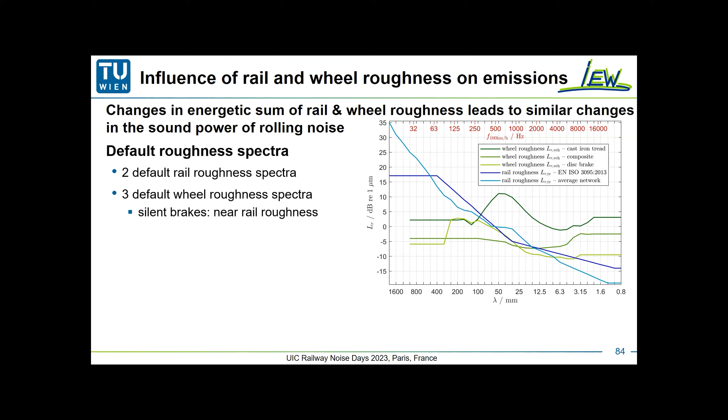And if you look at the case of silent brakes, you see that the rail roughness and the wheel roughness are quite similar in the middle wavelength range, which is very relevant for A-weighted levels. So both wheel roughness and rail roughness will be relevant for the rolling noise when you have silent brakes. Within several national research projects, we also collected some rail roughness measurement results at straight tracks at various sites in Austria. And you can see it again in the diagram.

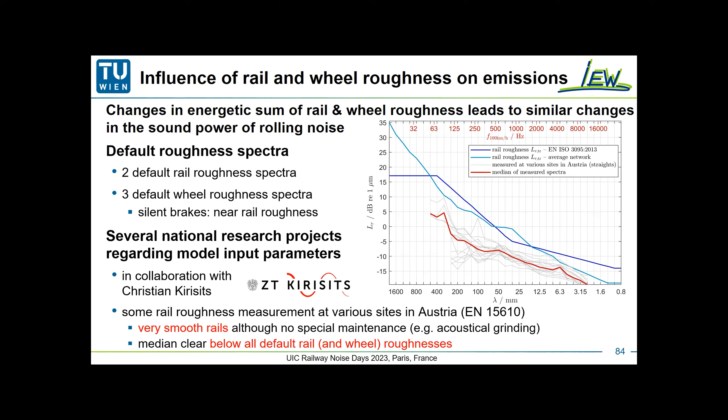At these sites, we have very smooth rails, although no special maintenance like acoustical grinding or something like that was performed. And if you compare the red highlighted median with the default values, you see it is clearly below these rail default input spectra. So what does this huge difference mean for prediction? With a simple variation analysis and some calculations, we have shown that such differences cause changes in the A-weighted level for trains with silent brakes of up to several decibels, and that's quite a lot for a prediction as an uncertainty of the input parameters.

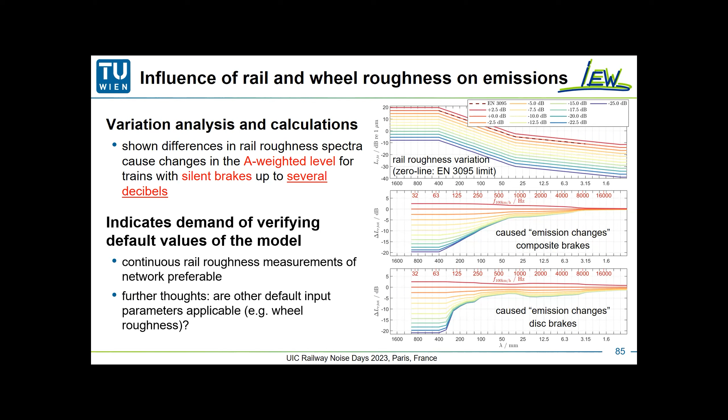So these results indicate a demand for verifying the default values of the model itself, at least in Austria. In case of rail roughness, a continuous measurement of the whole network would be preferable to build meaningful mean values. Possibly with a vehicle-side laser-based measurement system, this could be possible. But we can also think further. If there are such big differences in the rail roughness, what about the wheel roughness? Is it applicable? We do not have any data at all for wheel roughnesses. So there is a demand for verifying such default values from the model to use it.

Now let's switch from the demands to the next point, to curve squeal. Well, within two research projects, we have some long-term measurements, which were carried out in narrow curves with different radii. And because of the huge amount of pass-bys, approximately 55,000 pass-bys, we developed empirically a squeal detection for an automatic assessment of the pass-by noise, which can distinguish between tonal components and broadband components. And based on this evaluation of the pass-by noise, we investigated some influences of radius, train type, and so on, also on psychoacoustic effects.

But beyond that, we also did a verification of the default surcharges in the prediction model. These are also some default input parameters. They are +8 dB for very narrow curves and +5 dB for a little bit wider curves. We found that squeal on loud trains only has a little influence on the pass-by noise level. And therefore, because of these findings, we were able to lower the surcharges in the national implementation of the model for loud vehicles. We lowered them to +5 dB, respectively to 0 dB, for cast iron braked vehicles. I think this is a good example of how successful research can contribute to improvement in the prediction model.

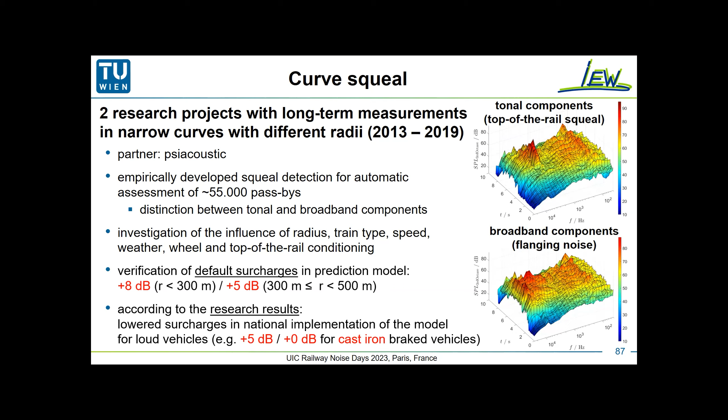So as a third, we came to transparent noise barrier elements. Well, it is well known that between trains and reflecting noise barriers, multiple reflections occur, which lower the shielding effect of the noise barrier and which increase the emissions behind the barrier. To lower the visual barrier effect of such barriers, more and more transparent elements are integrated in noise barriers, and they have a similar effect on the emissions behind the barrier, up to several decibels. But there is no calculation scheme in the model.

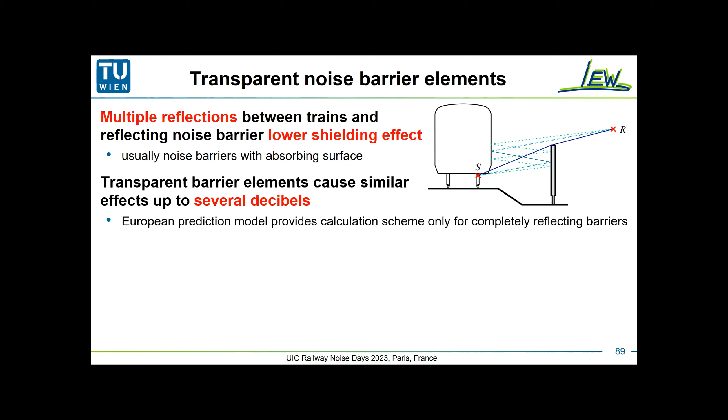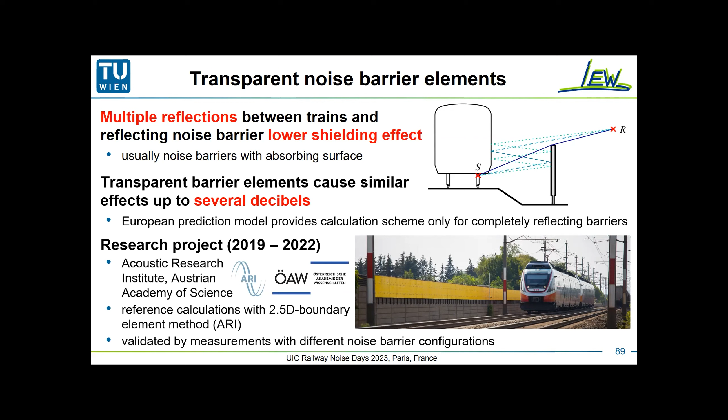How to consider this. Therefore, we had another research project to study these effects in detail. There we did some reference calculations, which provide very exact results of the emissions behind the noise barrier. And we validated these reference calculations by measurements with different noise barrier configurations, as you can see on the right side. And the main result was the development of a calculation scheme for partly reflecting noise barriers, which is already well prepared for an integration into the national regulations.

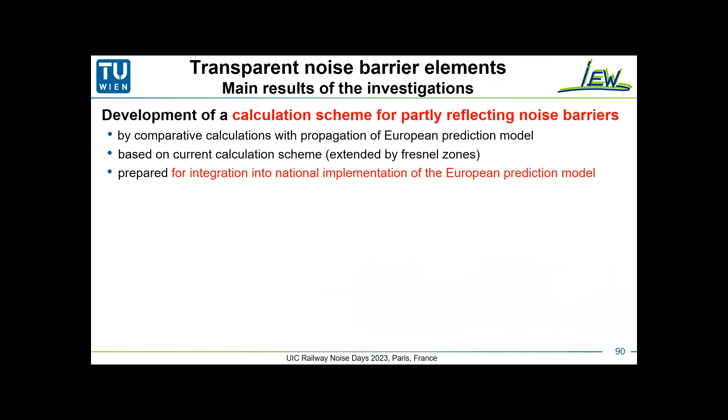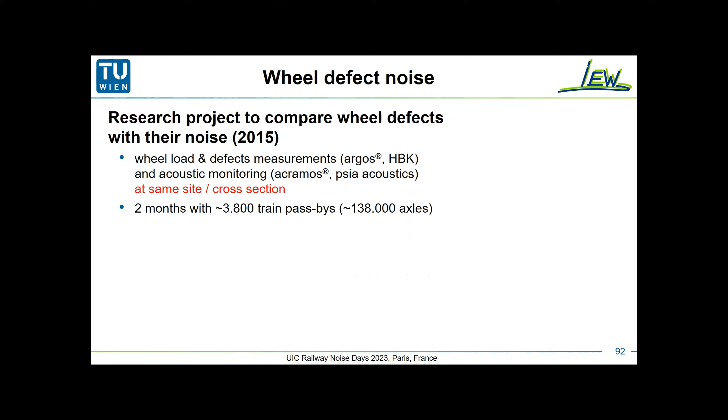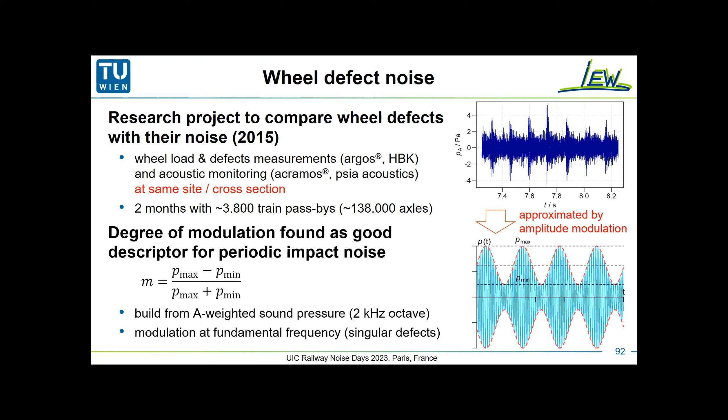So last but not least, the wheel defect noise. Well, within research projects, we compared measured wheel defect parameters with the pass-by noise. And both were measured at the same site from 3,800 train pass-bys. And because of the similarity between the sound pressure time signal in case of an impact noise and an amplitude modulated signal, we found that the degree of modulation is a good indicator for perceptible periodic impact noise for singular wheel defects. And based on this indicator, we did some statistical analysis.

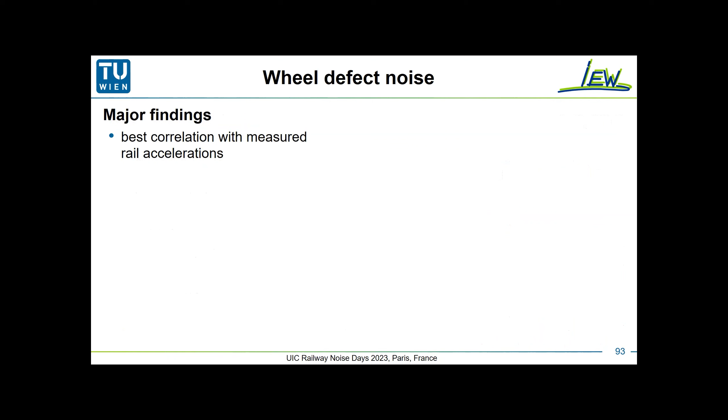And we found several things, but what was interesting was that the general correlation level was only very low. And to explain the reason for that, I have prepared some sound samples from a cargo train pass-by. This train had two comparable wheel defects, one in a section with loud wagons and one in the section with silent wagons. And now, how does this wheel defect sound? This was a sample in the loud section and now in the silent section. So I hope everybody of you could only hear the impact noise in the silent section.

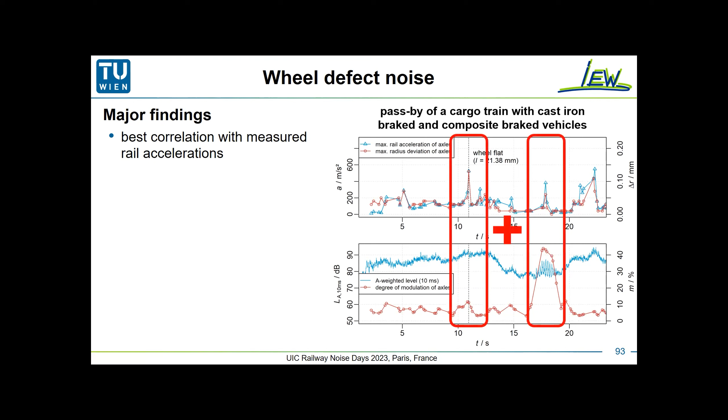But what will happen if we superimpose both signals? Nothing. You won't be able to hear the impact noise because the rolling noise of loud vehicles is able to mask wheel defect noise completely. And vice versa, if we have in future more silent vehicles, this will probably also lead to a more frequent occurrence of perceptible wheel defect noises. So then we should maybe ask for a model extension also for this type of noise, because the noise indicators provided by the current model are almost insensitive to this kind of noise.

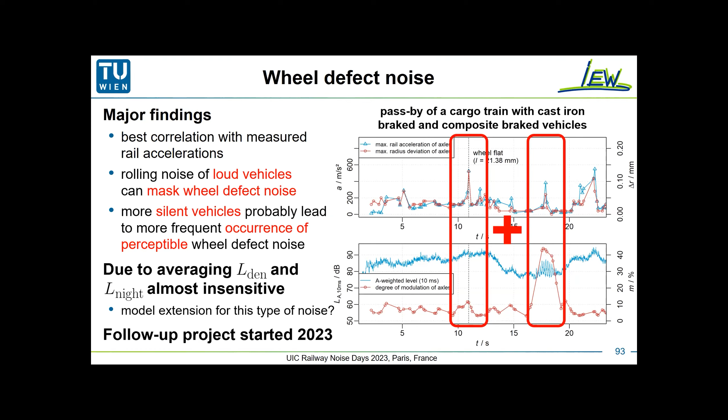So I come to the end of my short presentation. I hope I could explain why I think that a reliable prediction is essential for reasonable and timely noise protection for residents. And I'm convinced that the European approach is very useful, but from my point of view, it should be seen as the beginning of an ongoing improvement process. And the current model partially leads to unnecessary and additional national efforts. I think that was not the main intention of the uniform prediction approach. I've shown that it provides too few or differently interpretable default input parameters, and it also contains some shortcomings.

And I didn't mention it, but it is also very important: it does not provide for the application of many protection measures, even if they are state of the art. For example, there is no calculation scheme for TDR influencing measures, wheel absorbers, or something like that. So you can't consider them in the model. And last, no standardized procedures are defined for how input parameters can be determined. For instance, if you have new vehicles, you're not able to determine some input parameters according to a standard.

So to sum it up, I think improvements will be required for the model, especially if you use the model for legally binding predictions. I also think that many aspects concern not only Austria, if you think about internationally operating trains. So for such subjects, European initiatives should be preferred. And then we also get results which are valid for all countries. And last, a little advertisement: science can help to build the basis for such improvements. Thank you very much.